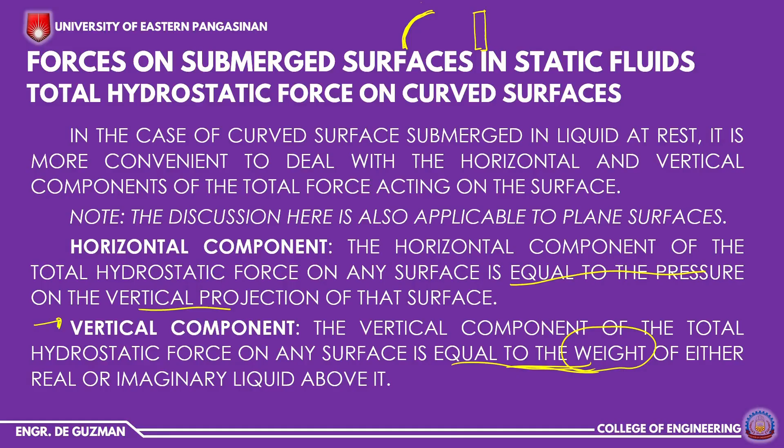Going back to FV, as we said, the vertical component of the total hydrostatic force on any surface is equal to the weight. So we can write FV equals weight. And recalling on the other side, our gamma equals weight over volume, the ratio of weight to volume of the fluid. So if we solve for weight, it equals gamma times volume. That's how we get that formula: weight equals gamma volume.

So everything connects, all the formulas. If you forget the formula for vertical force, just remember that the vertical force is equal to the weight. To get the resultant force or total hydrostatic force, we use a formula from statics: F equals the square root of horizontal force squared plus vertical force squared, derived from the Pythagorean theorem.

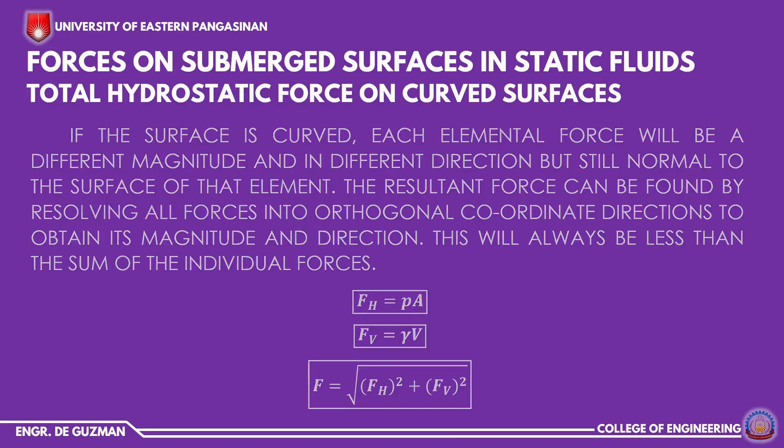We have two cases for curved surfaces, and this is where the real or imaginary fluid comes in. In case 1, the liquid is above the curved surface. Notice this different color here — this part is our curved gate. So when we get our horizontal force...

...the solution comes from the vertical projection of our curved surface. This is our vertical projection. So the formula for FH is gamma times H bar times area. Our gamma depends on the liquid, and our H bar is here, cg to the liquid surface — that's the H bar. Then the area is, of course, the area of our vertical projection.

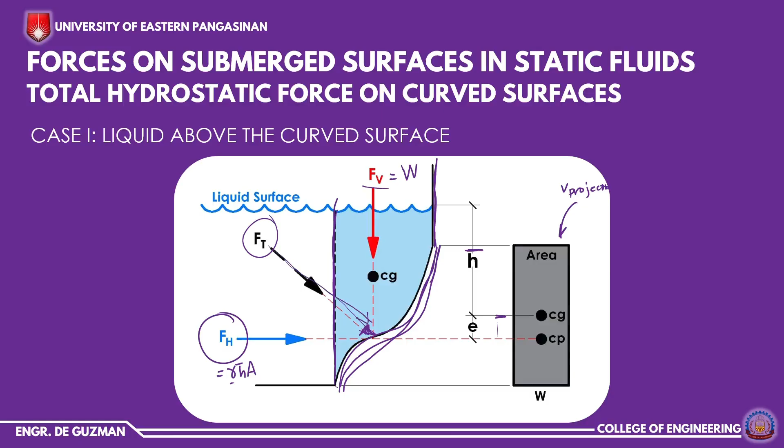So malamang dito, since nasa ibabaw, pababa, kasi yung force natin is ito. So lagi lang kayo mag-draw ng perpendicular. Okay, so yan yung ating dalawang case.

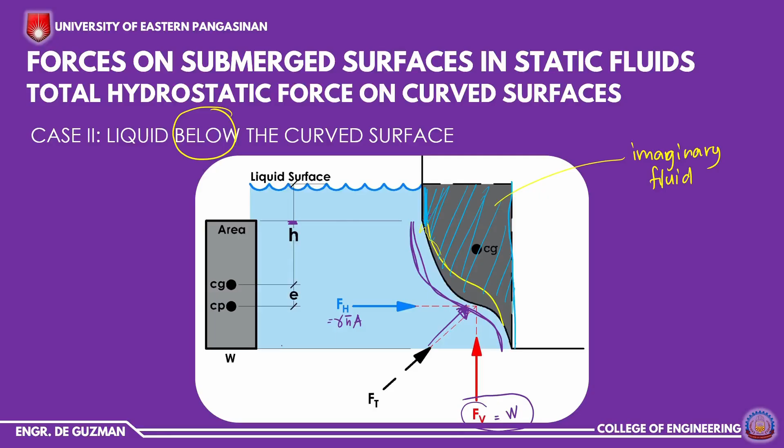So let's proceed sa ating example. Okay, basahin natin yung problem. A quarter circle gate AB through a canal shown runs 10 meters into the figure. So determine the horizontal and vertical force. So ito dapat na problem na to meron tayong figure dito, pero hindi ko na ilagay.

So ito yung ating water surface. Then meron daw tayong quarter circle na gate. So when we say quarter circle, 1/4 ng circle. So ito yung ating quarter circle. Mas mahirap pa mag-drawing kaysa mag-solve.

So ang pinapahanap sa atin is the horizontal and vertical component. Yung horizontal, yan yung ating FH. Then vertical component natin is the FV. So first step is to, syempre, vertical projection agad. So ito yung ating vertical projection. Ang sabi nito, di pala na ilagay, ang radius nito is 4 meters.

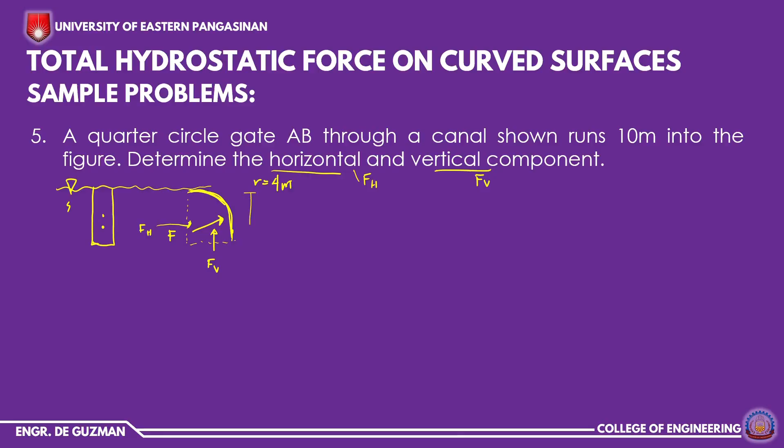So kapag ang radius natin ng quarter circle is 4, malamang itong patayo dito, 4 din, tama? So kung 4 ang radius natin, 4 din yung kanyang height. Then sa base, sinabi dito na nagrun daw siya ng 10 meters. So paano nakuha yung 10 meters?

Kasi ang titignan po natin dito, yung drinodraw nating vertical projections is, paano pa mag-drawing? For example, ito yung ating curve na gate. Sana na-imagine nyo, titingin tayo dito. Ito yung ating mata. Kapag tumingin tayo dyan, ito yung makikita natin. Meron tayong 10 meters long na curve o na gate. Then ito, yung taas niya is 4 meters. Kapag tumingin tayo sa kanyang side, sana na-imagine nyo yun. So ganyan.

Okay, so first na isa-solve natin is the FH. Sa FH, para ma-solve natin to, titingin tayo sa vertical projection. Gamma H bar, area. Itong FH natin, anong color ang maganda? So lagi titingin tayo sa vertical projection. Sa vertical projection natin, meron tayo dito CG at CP. So ito yung kanyang E. Balik tayo.

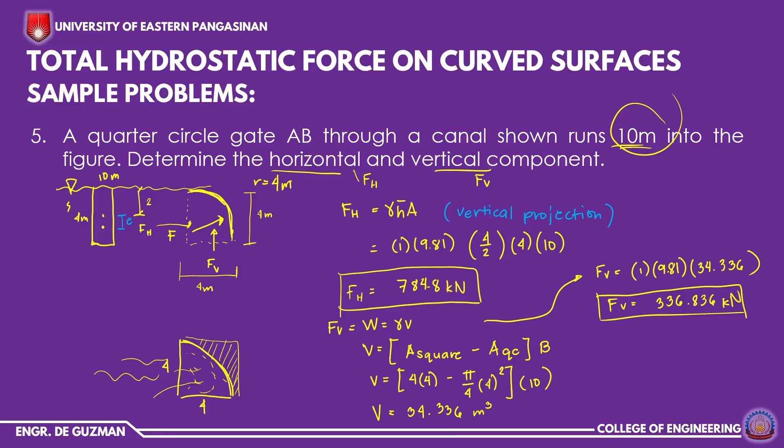So, yan yung ating horizontal and vertical component. Paano kapag tinanong, what is the total hydrostatic force? Kapag tinanong sa inyo, what is the total hydrostatic force?

Yung formula natin dyan, Ft is equals to square root of FH squared plus FV squared. Square root ng 784.8 squared plus 336.836 squared. Kung kinumpit nyo yan, ang lalabas dapat is 854.031 kilonewton. Ito, kapag tinanong, what is the total hydrostatic force?

Kung nung plane surface, ang total hydrostatic force natin doon is automatic yung FH natin. Kasi, di ba, ito yung ating mga gate. Tapos, ang nag-aaklang, di ba, sabi natin, perpendicular. So, ito yung F, equal din lang yan sa FH. Yung vertical component natin nandito, FV, para makakancel din lang yan. So, wala tayong FV kapag plane surface.

Okay, so next example tayo. Number 6. The submerged curve AB is 1/4 circle of radius 2 meters and is located on the lower corner of the tank. So the total depth of water is 6.5 meters and the length of the tank perpendicular to the sketch is 5 meters. Find the magnitude and location of the horizontal and vertical component of the total force acting on AB. Sabi dito, yung total depth daw ng water is 6.5 meters.

So, drawing natin tayo, 6.5. So, yung gate natin dito is ito. Ang sabi, ang radius daw is 2 meters. So, itong length na to is 2 meters. Then, ito is 2 meters. So, kung 2 meters to, ito pala ay 4.5 meters.

Kasi tangke lang daw yan. Tapos yung gate niya, may gate daw sa baba. Then, papansinin nyo, nasa above the liquid, above the curved surface yung ating liquid. So, ito, perpendicular force. So, perpendicular force, F. Then, FV, tapos FH.

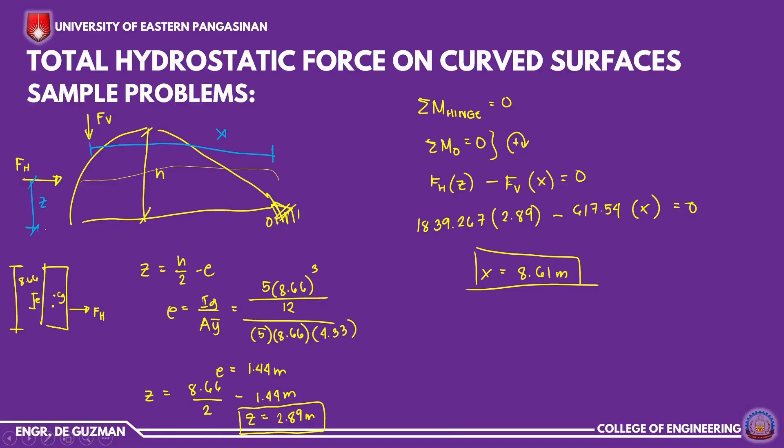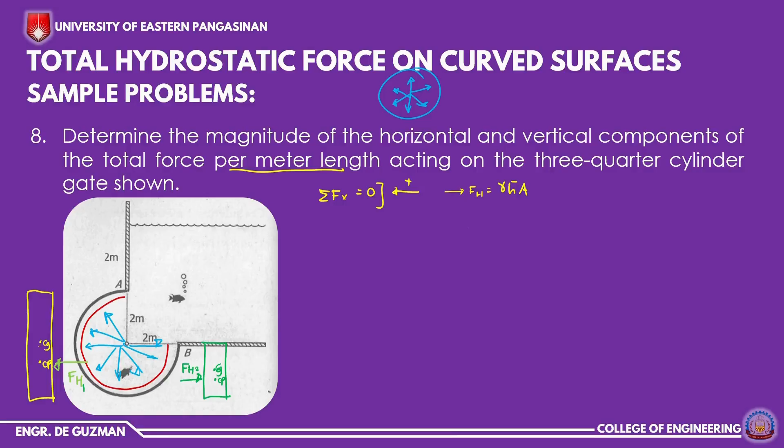Ngayon, kapag kukunin na natin yung horizontal component niya, isa-summation lang natin yan since dalawa yung ating FH. So summation of horizontal force is equals to 0. Mas malaki kasi yung pa-left, kaya ang i-assume natin, positive yung sa left. So ang FH natin dito ay gamma H bar A. So FH1 minus FH2 equals, yun na yung ating FH net na.

So FH1 is 1 times 9.81 times ilan ang kanyang H bar. So meron tayong 2 yung kanyang radius. So 2 plus itong part na to plus 2, so 2 plus 2, 4. 4 times 1 times 4. Ito, 1, kasi ang sabi sa problem, i-consider natin per meter. 1 yan, then ang kanyang height is 2 din ito, tama? So 4, 4 yung kabuuan.

Then ito naman, minus 1 times 9.81 times, so meron tayo ditong 4. Tapos kalahati nito kasi sa CG, so 5 times 1 times 2 equals to FH. So FH natin equal sa 58.86 kilonewton. So yan yung ating horizontal force.

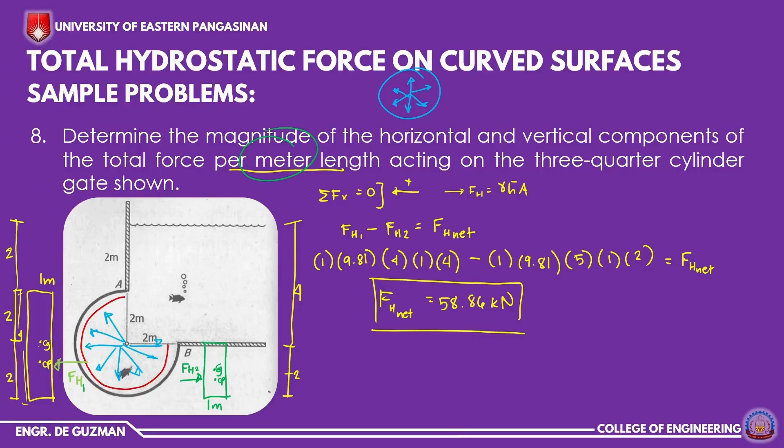Okay, so ito yung ating figure. So sabi natin, FV is yung mga nasa sakupan ng ating gate. So ito, yung gate natin, papunta dun. Ito din, papunta. So ang volume na i-consider natin dito is itong part na ito. Pero itong part na to, imaginary, kasi wala dyan yung liquid. So itong part naman na to, yan yung real fluid natin. Tama?

So ngayon, para isolve natin to, hahatiin natin yan into shapes ulit. Bakit? Kasi yung part na to, di pa pataas yung kanyang force. Then itong part naman na pababa is nandito pababa. So hahatiin natin yan. Nakaroon tayo ng dalawang figure natin.

So isa, so meron tayo. Ito yung gate natin. Tapos yung gate na yan. So gate, tama, next na gate is nasa ibabaw. O ganyan.

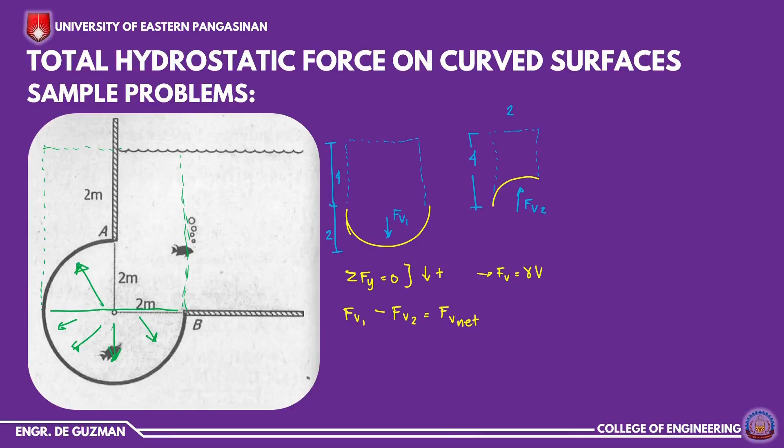So summation of Fy is equals to 0. Yung mas mataas si yung pababa natin na force, so yung assumptions natin is downward positive. So ang FV natin ay gamma volume. FV1 minus FV2 equals to FV net. Times na natin 1 times 9.81.

Yan yung gamma. Then, ang volume natin dito is, ano yung volume natin? Yung part na to. Mag-plus natin si 4 times 4, ito yung 4 times 4 ito. Tapos i-plus natin si half circle. Paano pag half? Plus pi over 2 r. R natin is 2 square. So para mag-volume, ito times natin sa length niya.

So sabi per meter lang, so 1 yung gagamitin natin. Minus 1 times 9.81, pwede dito na lang sa baba. So yan yung FV. Minus 1 times 9.81 times, so ano to? Meron din tayo dito. Rectangle 2, square pala, ay hindi, ito na dalawa. Sige, mas madali kapag ito. Pag itong part na to, rectangle, minus natin ito, half na ay quarter circle. So 4 times 2 minus pi over 4 times 2 raised to 2 times 1 equals to FV.

So sana nag-get nyo yun, ha? So yan, so kapag sinolve natin, FV net is equals to 170.937 kilo. So ito yung answer sa ating number, last number 8.

So yan, hindi ko makita yung book ko, kasi alam ko anong approach dito sa problem na yun. So kapag may tanong kayo, message nyo lang po, kasi ang alam ko yung sa approach niya is iba eh. Wait lang, check ko na lang. So parang same din lang. Yung instructor ko kasi dati, ang ginawa niya is hinati-hati niya pa, so 3 yung hati niya. Pero pag ganyan, pag ganyan, tapos yung isa, pag ano, so 3 yung hati niya. So sa inyo ngayon, so yun lang yung ating example.